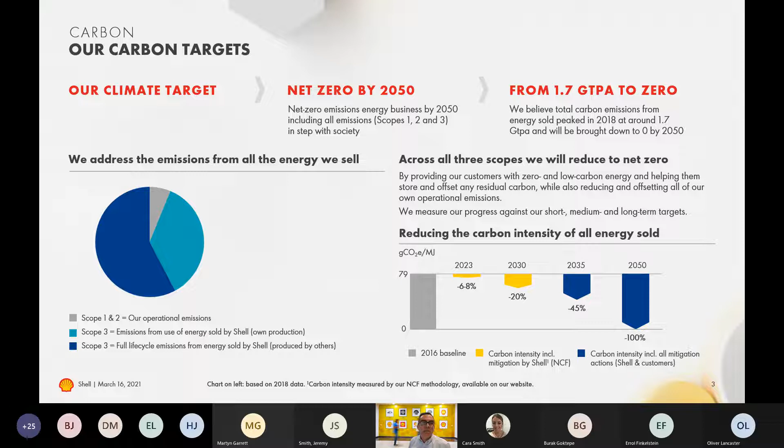So that brings us on to the opportunity itself in Milford Haven. I'm not sure how much the broader audience knows, but just in a nutshell, blue hydrogen is made from converting natural gas into hydrogen, and then the blue part is capturing the carbon that is emitted as part of that process. So the key ingredients, if you like, for a blue hydrogen project are a supply of gas, a market for the hydrogen, and an export route for the long-term storage of the carbon that's captured.

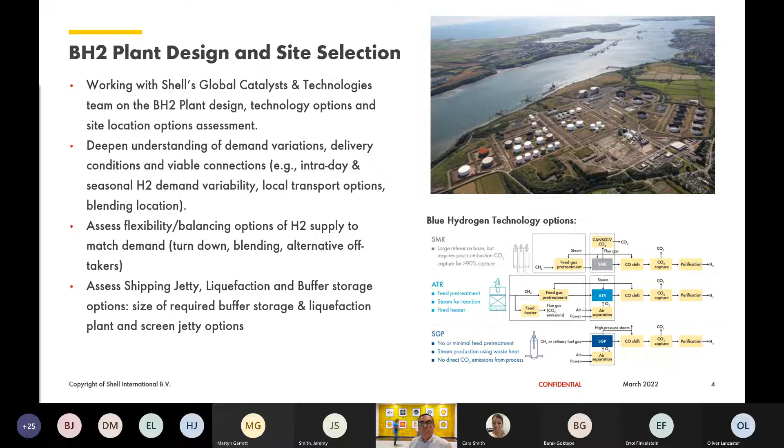In my next slide here, hopefully you can see we're exploring the various options for this facility in terms of jetty location, vessel size, storage requirements, and again these will all influence the overall design.

We're now deeply involved with the broader industry on the evolution and optimization of CO2 carriers, both in terms of size of the vessel, operating pressure of the vessels, and basic design.

Furthermore, we're working with organizations to develop common standards to ensure both the safe operation of this process and these vessels, and also the compatibility. We think potential compatibility between projects will be important, especially in the longer term too.

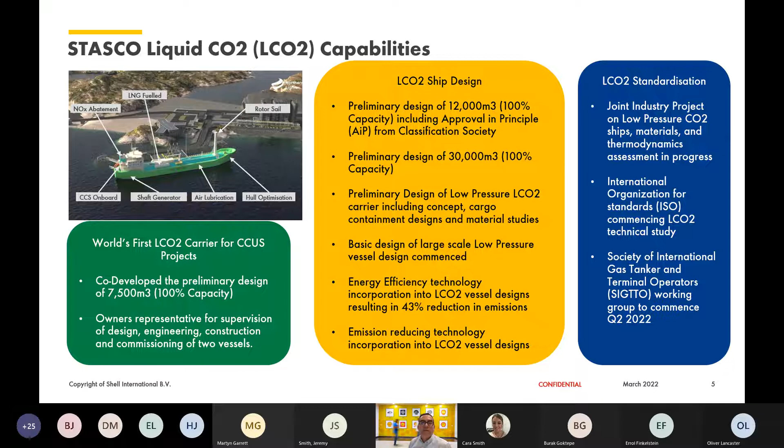So that concludes my whistle-stop tour overview of Shell's Blue Hydrogen project in Milford Haven. We have some Q&A at the end, so hopefully you'll have some questions that I'll do my best to get through during that session. Many thanks, I'll hand back now to Oliver.

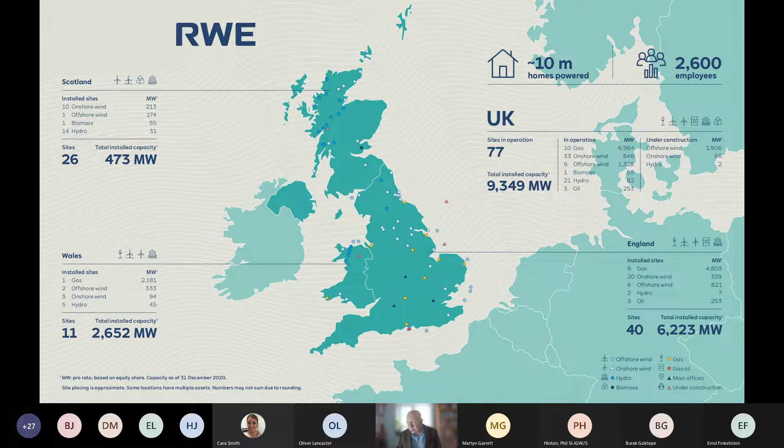Just a little bit about our green hydrogen business in the UK. This is a team - the worldwide team within Generation went from one person at the back end of 2020 to approximately 70 people now. In the UK, we're growing from 4 people to 8 by the early part of this summer. We're working on approximately 30 green hydrogen projects across core markets, and our core markets are UK, Netherlands and Germany.

Our focus within the team is on green hydrogen production, mainly aimed at industrial off-takers and mobility, and finding routes to market for grid constrained offshore wind locations for the hydrogen colleagues within our renewables business.

We're potentially also a user of blue hydrogen. A power station like Pembroke needs to decarbonise, and blue hydrogen might be part of that picture.

We have activity across what's called the value chain. So we're a renewable developer. We can supply power to electrolyzers. We can build and operate electrolyzers. We can supply and trade hydrogen to customers, industrial customers. We could trade certificates, etc. And potentially we could use green hydrogen as well within our power stations.

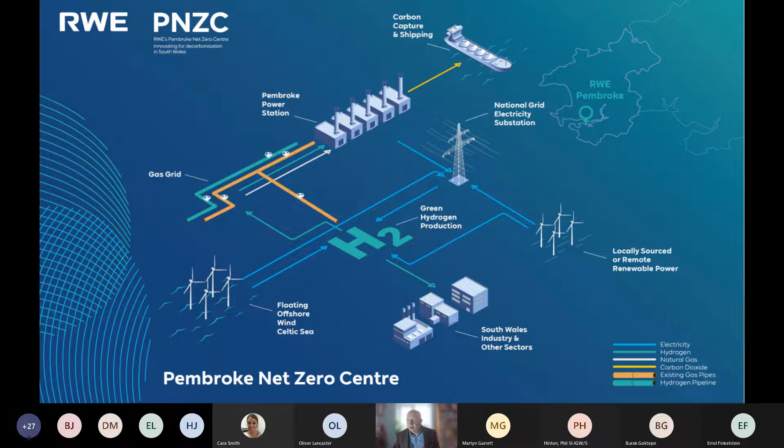This is an infographic that shows some of the various flows and interrelationships down at Pembroke that we have, and really, I guess the key message is hydrogen's at the centre of that. So we've got the potential to create hydrogen from floating offshore wind or grid connected renewables. We've got the potential to put that into the gas grid, to supply industrial off-takers in South Wales. The Pembroke Power Station has potential for post-combustion carbon capture and storage, which then leads to carbon shipping, or potentially hydrogen through the power station can create power, which then goes back into the grid.

This slide really is kind of giving a feel for what we're actually doing in the three pillars and what the opportunities are, particularly for Wales. So, the power station decarbonisation - we've got, as I said, a state-of-the-art 2.2 gigawatt power station that we need to decarbonise. So we're doing a number of studies with SWIC as part of SWIC to look at that, kind of pre-feed studies. We're looking at a variety of hydrogen blends, conversion to hydrogen, but also post-combustion CCUS.

And that will give us the information to start to think about, well, actually, how do we physically change this power station to one that is decarbonised in the future. So what are the opportunities that arise from that? Well, potentially local blue hydrogen production, CO2 shipping, and a memorandum of understanding with Shell is something that we're working on for various projects as well, not just this project, but other projects in the UK.

On floating offshore wind, the opportunity there initially is the 4 gigawatt Crown Estate leasing round that's expected either late this year or early next.

We're targeting a gigawatt scale development project there. That then leads to opportunities locally, particularly in the Port of Milford Haven, around improved port infrastructure, construction laydown, building of the floating foundations, a whole load of engineering work for that in the long-term operations and maintenance basis, supply chain jobs, skills, apprenticeships nearby, and then the green hydrogen project.

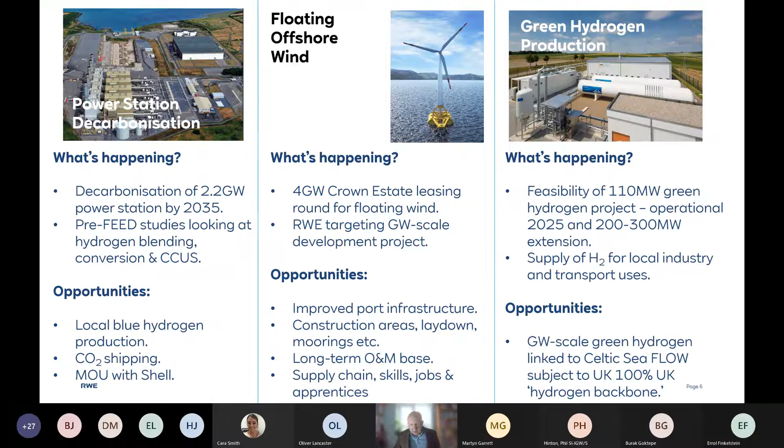Just a little bit more about the programme for our green hydrogen project. We're now at a stage where we've got feasibility reports done. The next stage will be to get the FEED study underway, and that starts very soon this year. We'll complete those FEED studies, then we go into a consenting process, look to get planning. Ultimately, we're hoping to get planning in time to build the first phase of the project in 2025. There's an awful lot of caveats to this, obviously, and I'll go into some of those.

Meanwhile, we'll start the FEED process for the second stage of the project, phase 2, and that will carry on but at a slightly delayed timeframe. As I say, first stage operational 2025, potentially 2026.

So there's a number of obstacles to all of this, and it's worth mentioning those because it might generate some questions. In terms of power station decarbonisation, one is around CO2 shipping, and particularly the policy development and creating a level playing field for CO2 shipping relative to pipelines. Wales has the issue that it hasn't got any obvious CO2 stores, so shipping of CO2 is important. From our perspective, it's important that that has a level playing field and is cost effective, encouraged by government, allowable, and it allows South Wales to decarbonise.

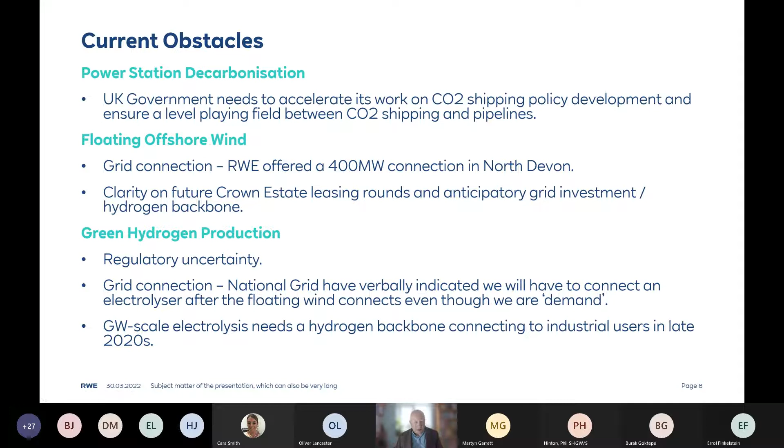Many thanks, Jeremy. It's good to see from both yourself and Phil as well, the pedal pressing that's happening in both green and blue hydrogen in this cluster, as well as the hydrogen backbone and Project Union, which also links to the wider European hydrogen backbone system across all gas TSOs across Europe that are working on that together. There's the local transmission system as well that I'm sure Henry will probably want to touch on.

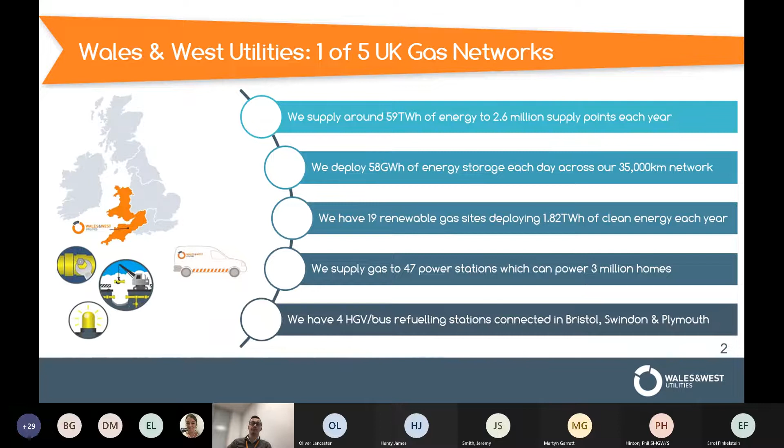By now, you should have seen various infographics of SWIC, as I'm sure you've caught various updates over the last 12 months, and have a fair understanding of the technologies being explored in terms of green hydrogen, blue hydrogen, as Shell and RWE have covered today, but also in terms of CCUS and the opportunities around that. The diagram on this slide shows the makeup of our activities in both SWIC projects.

It's lesser known that there are 2 strands to SWIC - cluster plan and deployment - and we've got work packages in both of those at the moment. When both projects kicked off about a year ago, we had a core group of 7 deliverables across both projects, which looked to do 2 things for Wales and West essentially. Firstly, we wanted to lay the foundations for a conversion of our network to both blended and pure hydrogen.

This is being done at the moment through our cluster plan work, which you can see on the left-hand side. That's being driven by a project we have ongoing called Regional Decarbonisation Pathways, where we're currently working with the Energy Systems Catapult and Costain to model our network across various sub-regions, and then apply that modelling to the physical network assets.

That modelling will then be applied to the physical network assets to see how they need to change between now and right out to 2050.

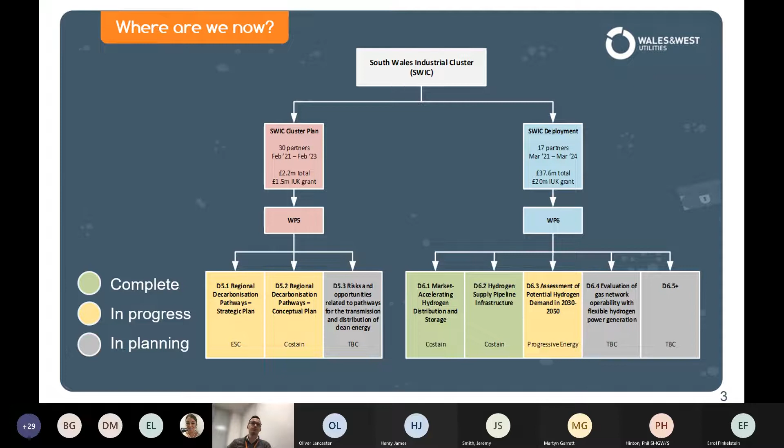So first off, I'll run through the basis of our regional decarbonisation work within the cluster plan, and I'll start by saying a little more about the driver for the project, which has come about from a growing need to increase communication with local authorities, as well as councils across our network, specifically in relation to local energy planning. So historically, these stakeholders have looked at their geographical areas really as an islanded network and don't always consider the need for looking at the wider region and national UK energy picture.

This is where we want to work with local energy planners to address this issue in particular, but also help to understand the future energy mix within their region whilst taking those national assets into account.

This is where this project comes into effect, which is a combined modelling and infrastructure assessment, which will develop what we're calling a strategic and conceptual plan, and that covers 9 sub-regions across our network, where South Wales is principally one of the sub-regions and covers the sort of SWIC geography.

So to do this, we're drawing on the Energy Systems Catapult models called ESME and ITAM. They're both whole system modelling tools, which are widely considered as best in class, and then working with Costain on the second part of the project to undertake the network engineering side and actually apply the findings of the modelling to our network.

In terms of progress - there's a bit of a flow chart on the slide - we were closely involved with delivering the Establish phase of the project, from when the project kicked off in August last year until the end of last year, just before Christmas.

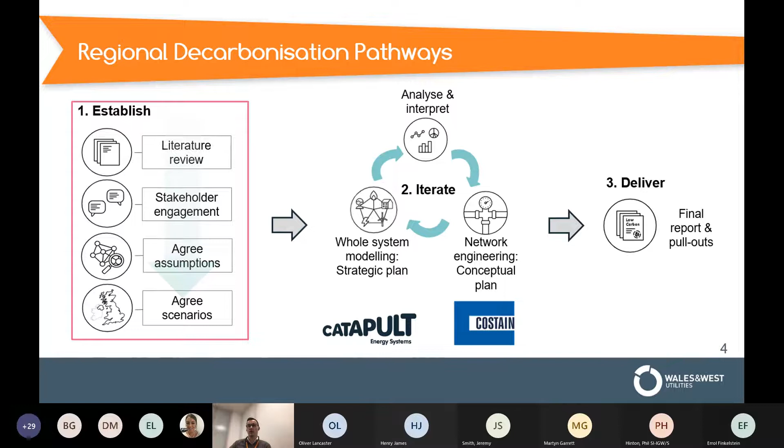So I put this slide in to give a flavour of some of the interim modelling outputs, which we began to see as modelling progressed. It's an important point that these are very much draft findings at the moment and may possibly change in the modelling iterations and reflected in the final reporting, so it's quite likely these will change between this presentation and when the final report goes public. It's also worth remembering that this is a techno-economic model, so it doesn't take policy and the trajectory of changing net zero targets into account.

The map on the right-hand side shows the split of the 9 sub-regions across our network, but these findings are solely for Wales—that's from the national ESME modelling tool—and then South Wales, the SWIC region, from the ITEM modelling. So the first output, and perhaps one of the more surprising outputs we've seen, is that there is some residual natural gas use in 2050.

That's largely driven by the steel and refinery sectors. Because all scenarios are net zero, this means that CCS or CCUS is capturing those emissions, and we're still reaching that net zero target in the scenarios. But with that being said, the majority of existing natural gas consumption is still switching to hydrogen by 2050, including a number of industrial users as well.

Secondly, then the majority of hydrogen consumed in Wales is to decarbonise residential heat and industry. Smaller amounts are used later on, in sort of 2040 to 2050, to decarbonise transport, particularly in Wales with shipping, which highlights the potential opportunity of drawing on the numerous deep water ports we have across South Wales, such as those in Milford Haven, Port Talbot and Barry.

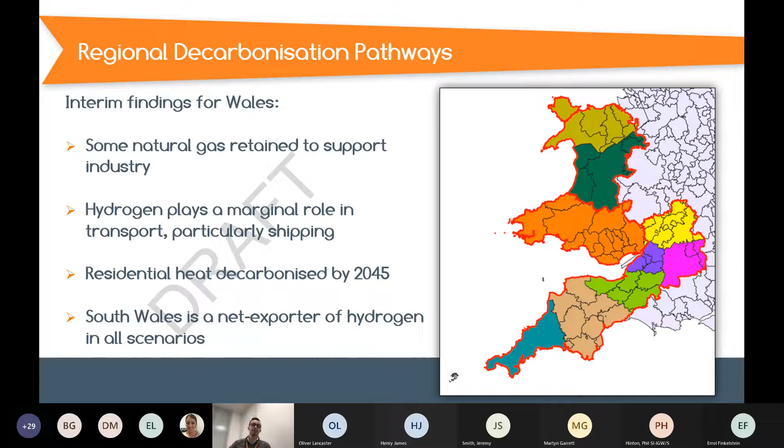So now moving away from our work in the cluster plan, within deployment we have an initial hydrogen infrastructure assessment, which we have worked to deliver alongside Costain. This work was really a desktop study to model the South Wales LTS, or local transmission system, for cases of blended and pure hydrogen.

The first thing I'll mention is the 3 scenarios we chose to apply to the gas network. For this, we decided that a transition to hydrogen use in the network would involve quite a significant ramp up in the 10 years from 2040 to 2050, when technology becomes more mature and things become more scalable. That means we actually modelled our low, medium and high scenarios as low in 2030, medium in 2040 and high in 2050.

So not necessarily a conventional way of looking at this sort of assessment, but given that the projected total regional energy demand doesn't look to really change across the 20 years between 2030 and 2050, we're quite comfortable that the low and medium scenarios could also be applied in the context of 2050, given the broad brush approach which this study is.

So each scenario represents different proportions of end use demand being fed directly from the gas network. The low scenario, as an example, views the gas network as it currently operates, where the primary source of demand is for domestic, commercial, and industrial heat, very well known, whilst the high scenario assumes that existing things like gas-fired power generation will completely switch to hydrogen by 2050, which reflects the intentions of RWE and other partners in SWIC, and also things like hydrogen for transport will also ramp up.

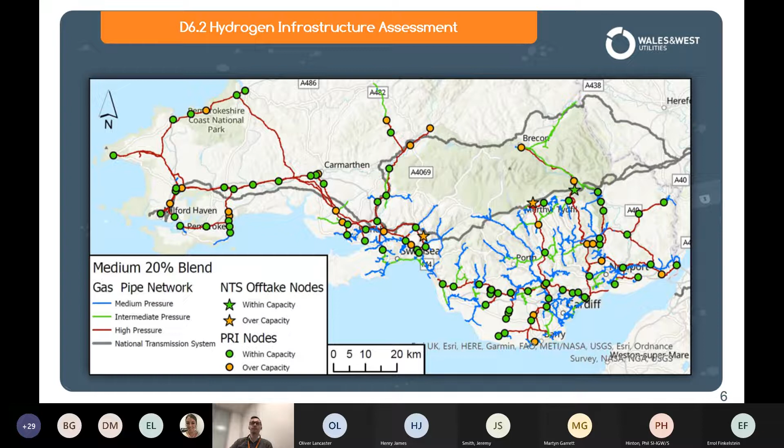So lastly, I'm going to talk a bit about the work we're doing with Progressive Energy, which brings all the thinking within deployment together and helps us move one step closer to having an initial conceptual hydrogen system design to satisfy potential demands in 2050. At the moment we're probably looking towards smaller, pure hydrogen LTS infrastructure, hopefully supported by a hydrogen backbone, which is what Project Union is hoping to achieve.

This is still work in progress and is due to complete in August, but is essentially building on the previous two deliverables, which we completed with Costain. What we're doing with this is moving away from the transition or blended state of hydrogen to focus on a pure hydrogen gas network, and start thinking about how we might actually link those large industrial hydrogen demands and production nodes together.

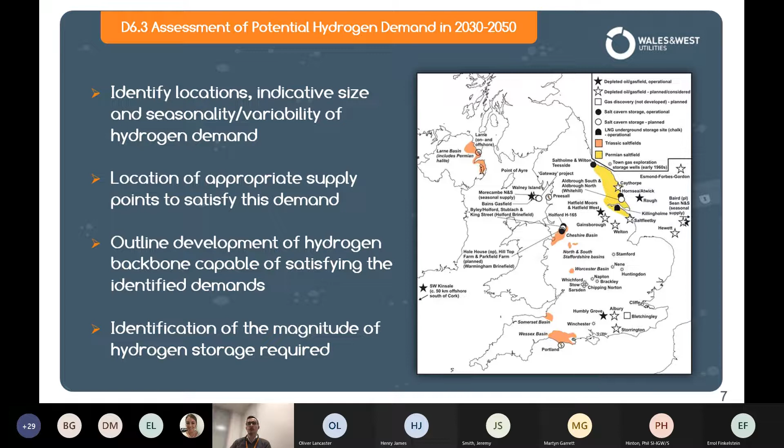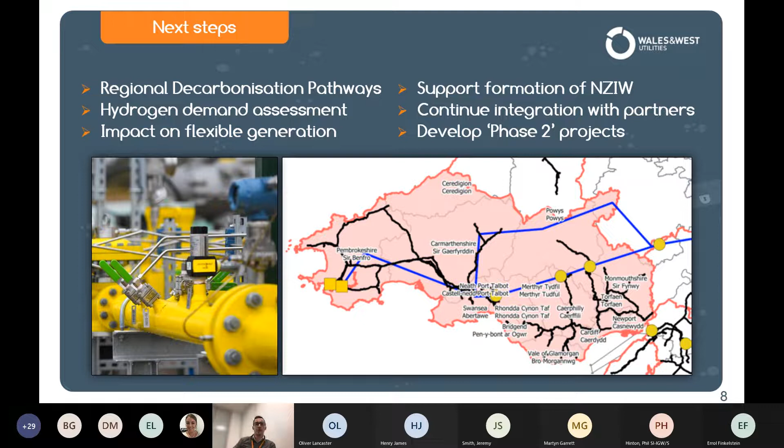And that's me done before the lights go off again. So thanks for listening, and I'll take any questions at the end.

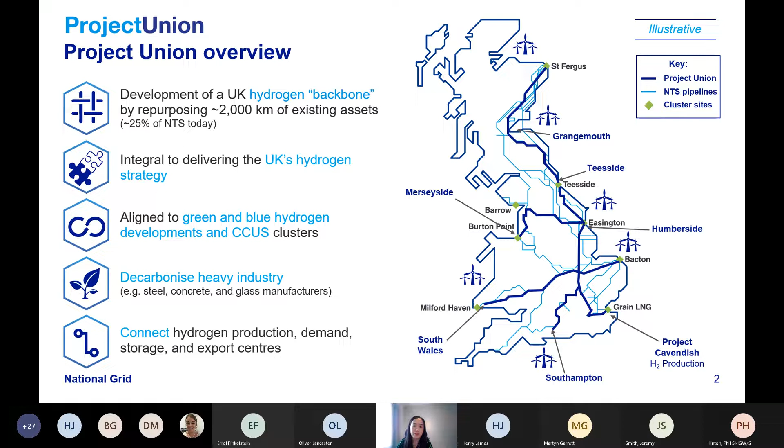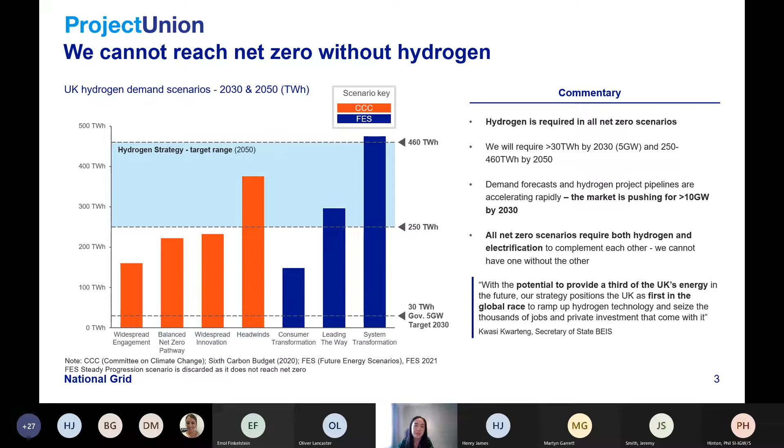We kicked off Project Union last year, and in the strategy phase we very much wanted to look at the vision, the overarching strategy for Project Union. So we engaged with stakeholders across the whole supply chain, about 75 to 80 stakeholders, on a one-to-one basis, sharing our plans for Project Union and understanding the needs from our stakeholders.

Just to highlight, this engagement is still ongoing, so please reach out if you want to speak to us directly about Project Union. This is key and vital for delivering the hydrogen backbone, and so it will be ongoing throughout the whole project.

50% of the industrial emissions sit within the clusters, but also 50% sit outside the clusters. So being able to provide that backbone across the UK to decarbonise industry, and also provide that optionality to decarbonise other sectors, supports the levelling up agenda across the UK - upskilling the workforce, creating jobs and delivering that hydrogen economy.

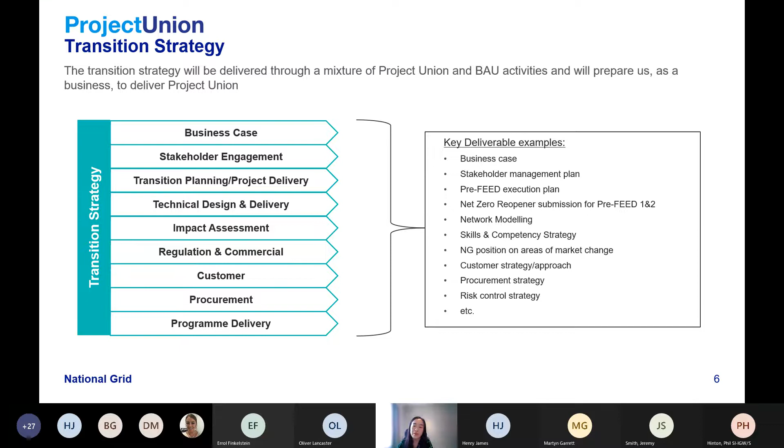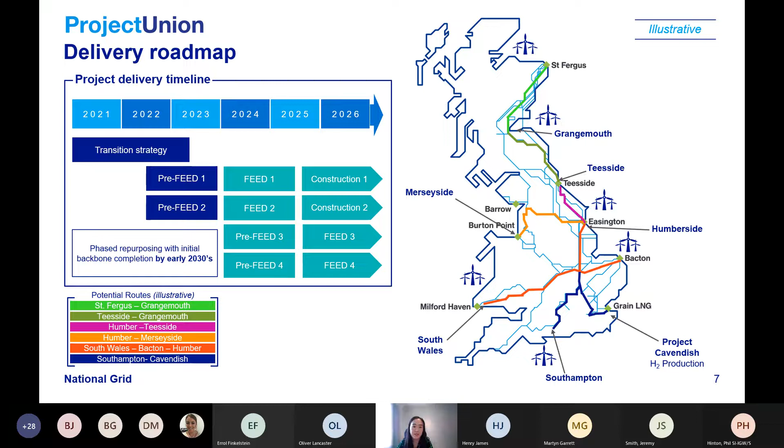Engagement is obviously key, so please get in contact if you want to speak to us and find out more. I guess the key design principles moving forward for Project Union...

Resilience is key. We have to maintain our resilience to the current methane network, as well as the resilience to the new hydrogen backbone that we're developing. Coordination is key - coordinating with clusters, coordinating with producers and demand, and understanding the needs of the end users that are on the potentially affected pipelines.

We want to future-proof the system, taking a whole system approach to our design of the network. We want the principle of minimal disruption, choosing the best routes that will cause minimal disruption and lowest cost to the consumer. So obviously reusing existing infrastructure that we currently have - understanding that if we can repurpose parts of the network, it will be key to keeping the cost down to the consumer.

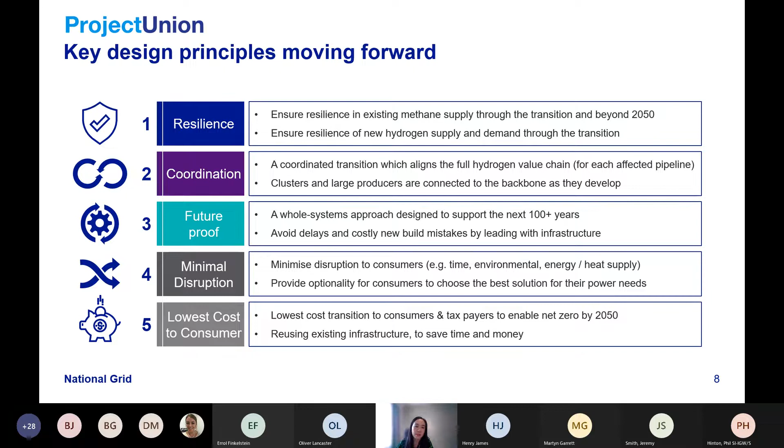So that was it from me. Yeah, happy to take questions at the end of the session.